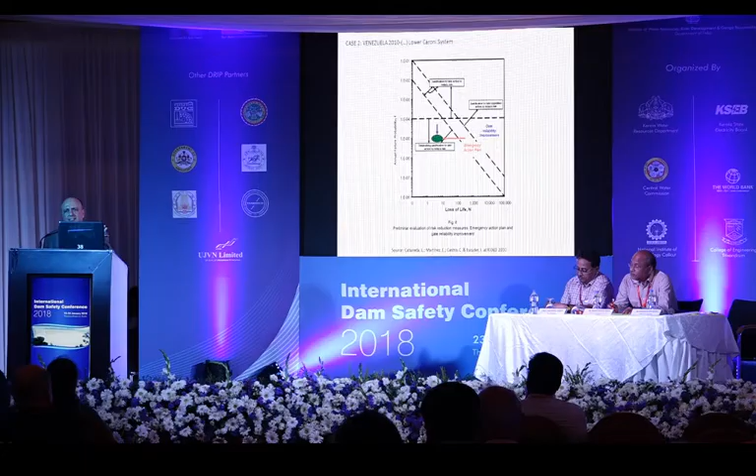So EDELCA shifted the focus... problems since the late 60s. And all this, I'm sorry, I can point there. Is the way you diminish risk by doing things.

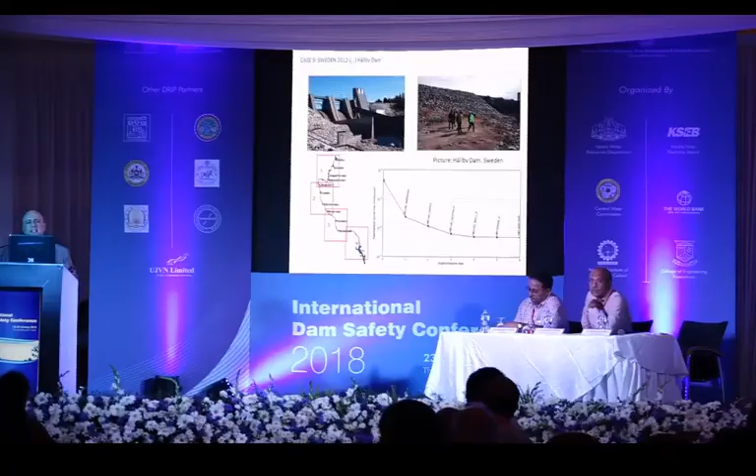So believe it or not, after 30 years, what was the ignition of an action plan, of spending money, of doing things, was that graph, in which you see the rate you can and how much you can diminish risk with your actions. So there's another magic in the numbers, which is, believe it or not, there are drivers of action, almost anywhere.

This study, for instance, is in the public domain. That's another lesson: transparency, being auditable, not having fear to show the way you made your decisions. That's smart, nice, modern governance, and that uplifts dam safety to a higher level of governance.

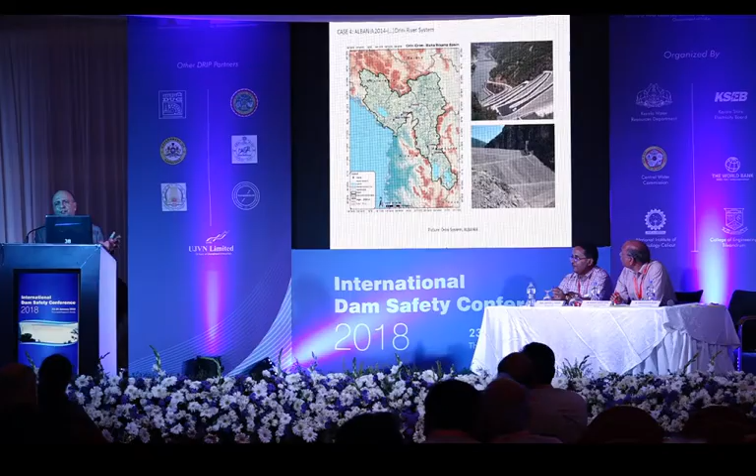Other systems with a lot of similarities to some of the projects maybe in other countries in which there's a lack of data, but you have a project so critical that if it were to fail, it would flood one third of the total surface of the country.

And you might not have a fully probabilistic approach. You might not have the inter-basin characterization of the flow as you wish, but you cannot wait 20 years to decide if you want a new spillway or not, or if it makes sense, or where it's more efficient to start with emergency action. So, accounting for uncertainties, assuming that we might be an order of magnitude right, or if you wish, an order of magnitude wrong, but we are not so much out of the picture.

When we put this graph to the owner, we built the numbers with them, and they assume they are very far right in terms of affected population, and they are clearly, no matter the exact number, above where they wanted to be in terms of probability of failure.

Again, you can account for and demonstrate the impact of your investments. If you see the horizontal movement, that's only with the emergency action plan. And it's not the same to say, I want to do emergency action planning because it has to be done, versus saying, in my particular system, I can reduce risk by two orders of magnitude. And that's a very compelling argument, two orders of magnitude.

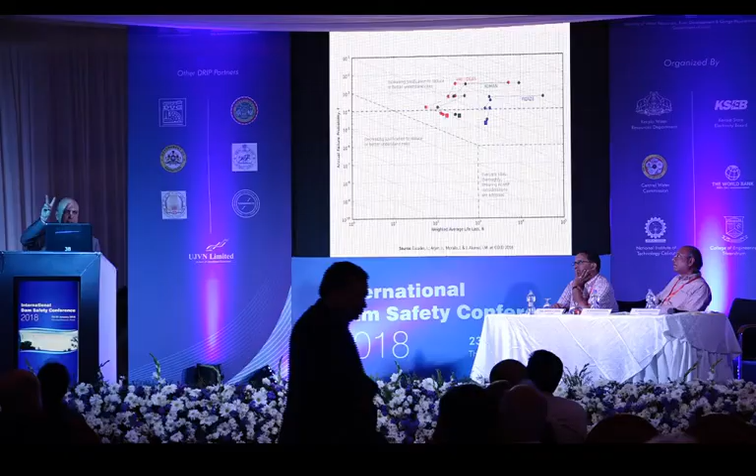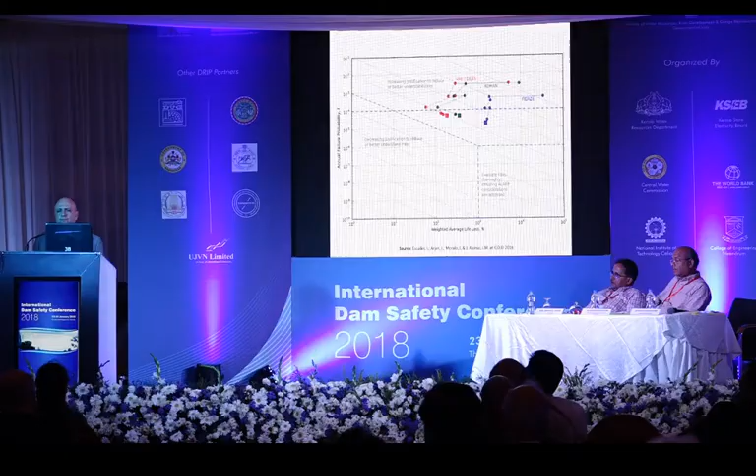And then the other things that will take a little bit more time will be complemented with data. There's something with the gates that can already be done, something with the operating rules, and that's the path KESH, which is a very strong public company in Albania, is moving forward with, motivating their human resources. So that's the path, and once you can plot the path, motivation of people increases.

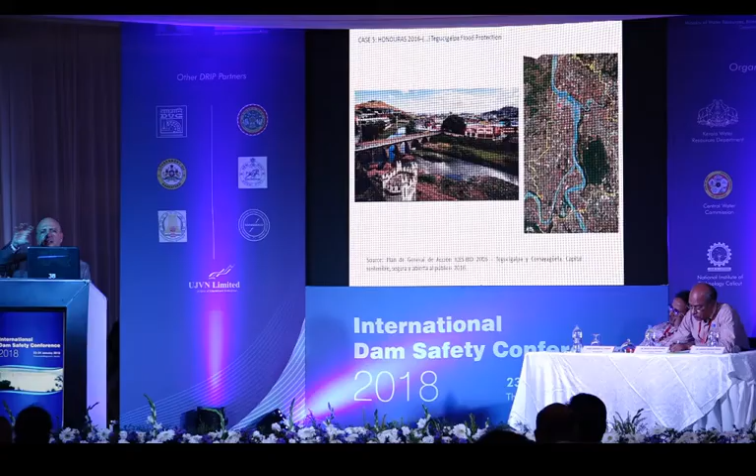More things about the scale. For instance, this is Tegucigalpa, Honduras, and they wanted to have a risk perspective only from the urban, more consolidated area perspective. But they would be getting a very wrong picture if they don't understand that these two dams, formerly far, have been embedded by the city.

So what you have is people living exactly in front of the spillway. You have a dam you cannot renounce because it is a water supply dam for the whole city, but you have embraced it with population, and the risk is 2, 3, 4 orders of magnitude higher than what you wanted. So what do you do?

First thing is don't say risk analysis is guilty of bringing the topic. The topic was there, quantification helps, and from there you can enforce urban policies, early warning, with a rational approach behind it. So they were brave enough to accept it and to have a more holistic approach to the urban flood risk, understanding the impact of what had happened from an urban point of view and the implications in policy and other non-structural measures.

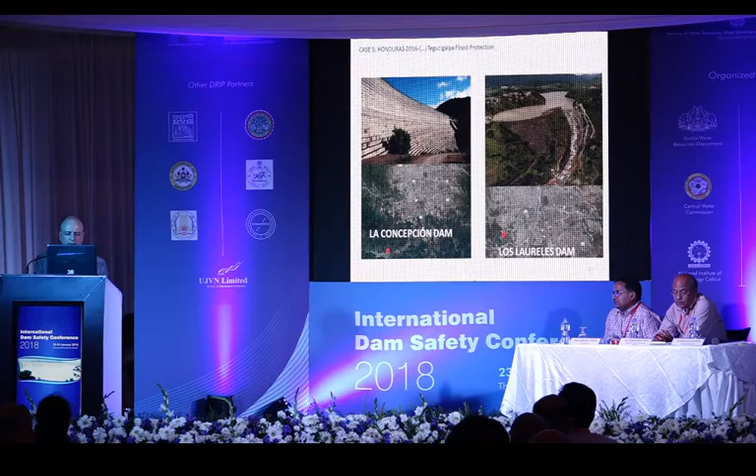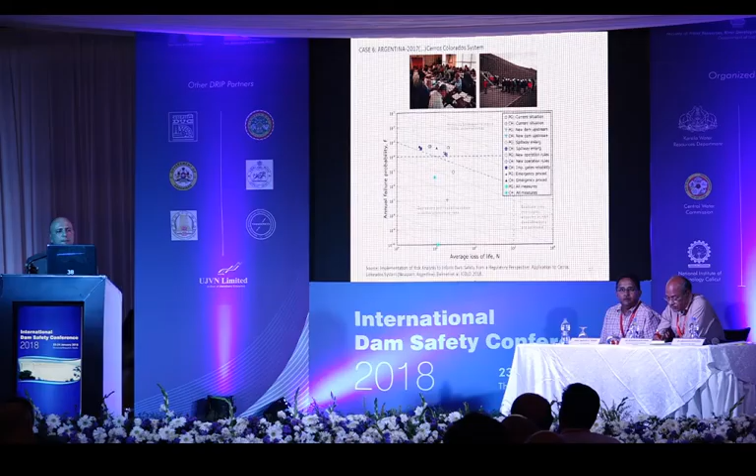Another value I want to bring to the audience is that if you are doing a collaborative approach on risk, by the time you get the numbers, the estimates on where you are and where you want to be, you already have the consensus if you have done it together.

Don't underestimate the value of consensus if you want to reach an agreement, especially if you've been working together. Because if there's ownership on the results of risk by the different parties, it will smooth the path to a negotiated solution. That's exactly what's happening in this very iconic project in Patagonia today.

Coming to this, though this graph is very nice because it ends up with the word success, denying the complexity and the problems would not be nice either. I wrote this paper with a colleague in the Corps of Engineers, Eric Halpin, who is in charge of the dam safety program for 400 dams, and the ontology, a proper definition of risk. The complexity, the uncertainty, the ambiguity, the tolerability issues, all that is not brought by risk analysis. It's there, but risk makes you address it whether you like it or not.

Second thing, and most important, is the last quarter: people, communication, and decisions. This is a joke I always make - you can write 100 articles and PowerPoints, pretend you are doing dam safety, but if you're not making any real decision, nothing happens. So either you have decisions and real investments at the end of the pipeline, or you have nothing. Either you have people engaged and capabilities, or you have nothing. Either you communicate it well, or it doesn't work.

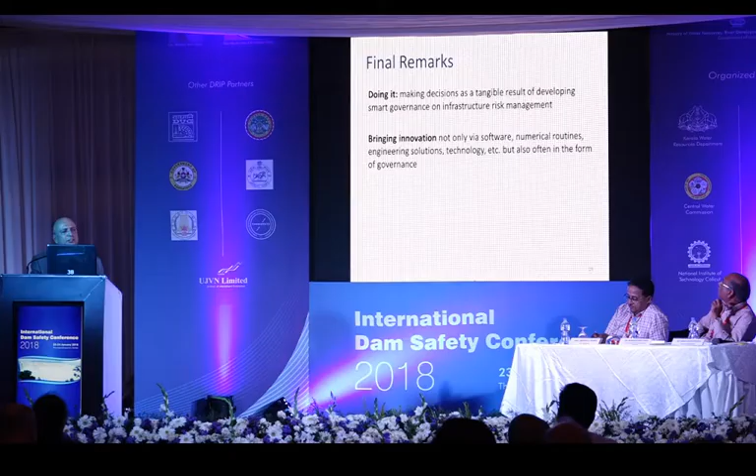Final remarks: if you don't go to the end and make decisions, you're basically doing PowerPoint dam safety. Bringing innovation with manuals, with guidelines, with legislation - innovation is not only algorithms, innovation is not only high cutting-edge technology. A good way to do things, a shift of paradigm, a conceptual approach is innovation. And this type of governance of dams is fueled by innovation and knowledge.

That's another collateral good you cannot forget. It's not a recipe, a cook recipe - it is how to incorporate knowledge in the chain constantly.

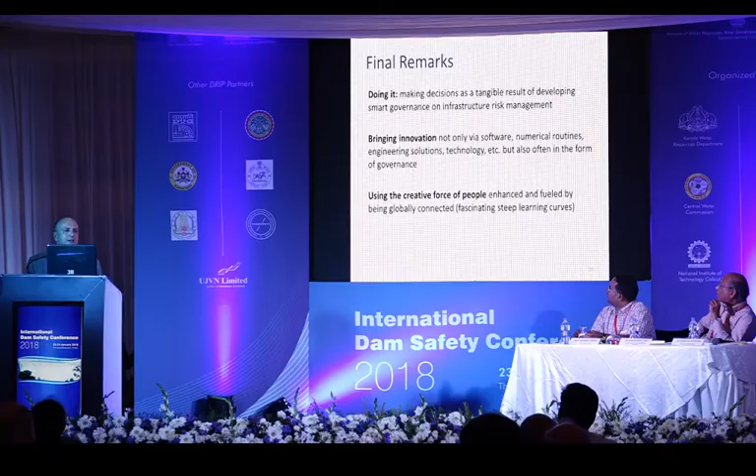Let's go back to globalization. So many people talking badly about globalization lately, right? Let's not underestimate the incredible learning curve that it allows us to have. You don't have to copy paste - you can bring best practices from all over the last half century. Do it your way, be creative, and be a leader very fast, and do things better than others very fast.

So paradigms shift in practice, and whenever you are tempted to say, oh, but we are doing better than 10 years ago, just ask yourself - is that good enough to cope with your real challenges? So go for it, that's my final thing. Thank you very much. Now I will be controlling others' timing.

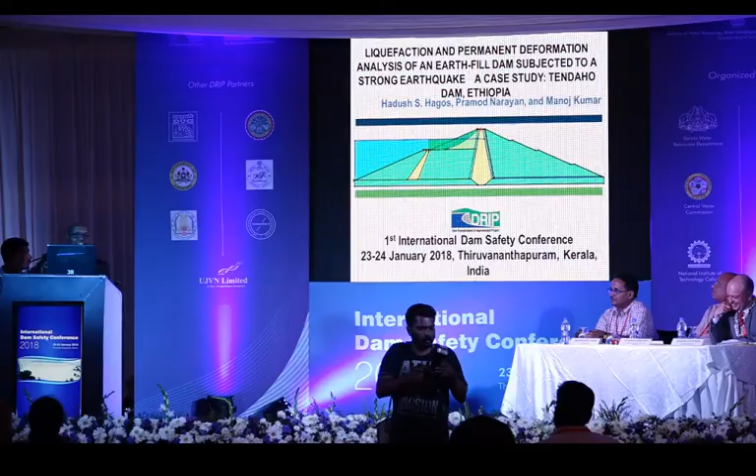Thank you so much, I'm very happy to be here. First of all, I would like to thank the panelists for their invitation. My name is Hadush. I work for the DRIP project in Egis, as the construction management and quality assurance expert for Egis. Because there is not much time, I think this introduction is enough.

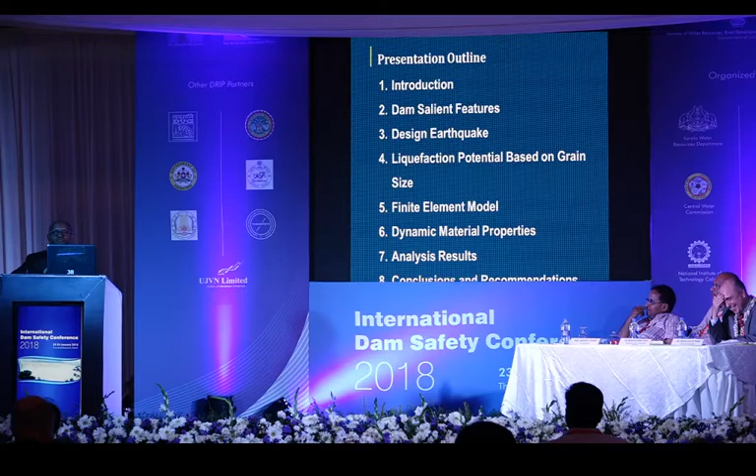This shows the outline of my presentation. I don't want to waste time on this, but I want to give some introduction. As you might have seen, the title of my presentation is Liquefaction and Permanent Deformation Analysis of an Earthfill Dam Subjected to a Strong Earthquake.

In the morning we heard that pseudostatic analysis is obsolete - I think Dr. Martin was saying that. Well, I'm not going to repeat that, but we need to do dynamic analysis, at least for dams designed on potentially liquefiable materials, or complicated geologies, or where you have high seismic areas.

Now just to give you a small introduction about earthquake engineering in dams: the first dams constructed in the first six decades of the 20th century, up to the 1960s, were found to be deficient in terms of earthquake design and flood design.

Of course, about floods, many people have been promoting improvements, and we have done additional spillways. We have improved many dams to help them behave against extreme floods. But in terms of earthquake, maybe it doesn't happen like floods every time, so a lot has to be done.

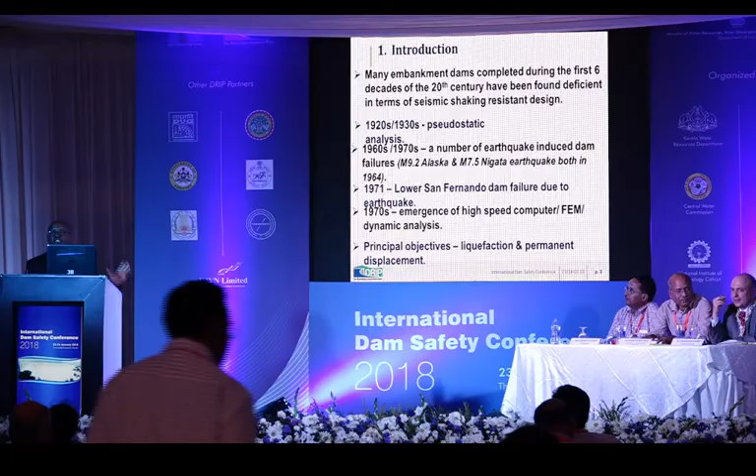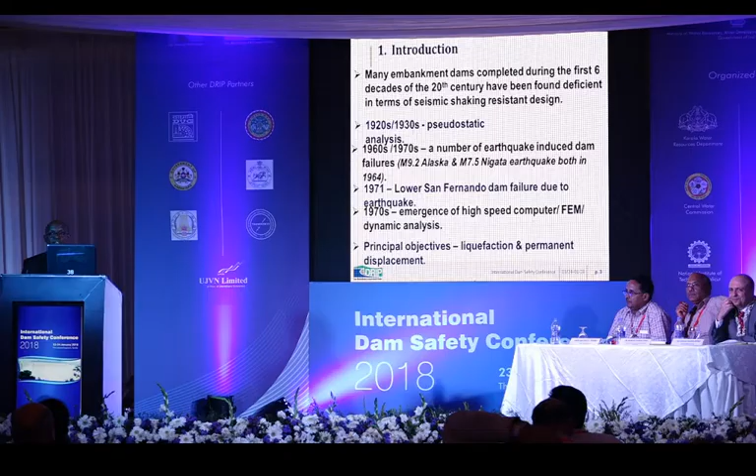The first time earthquake engineering was considered in dam design was in the 1920s, and that's when we started, in the 1930s, the pseudostatic analysis. In the 1960s and 70s, some earthquakes happened and some failures also happened in dams. People started to think that pseudostatic analysis may not be sufficient, or may not always predict the behavior of dams, and they tried other methods. About the same time, in the 1970s, new technologies in terms of high-speed computers and finite element method were emerging, and this gave interest to do dynamic analysis.

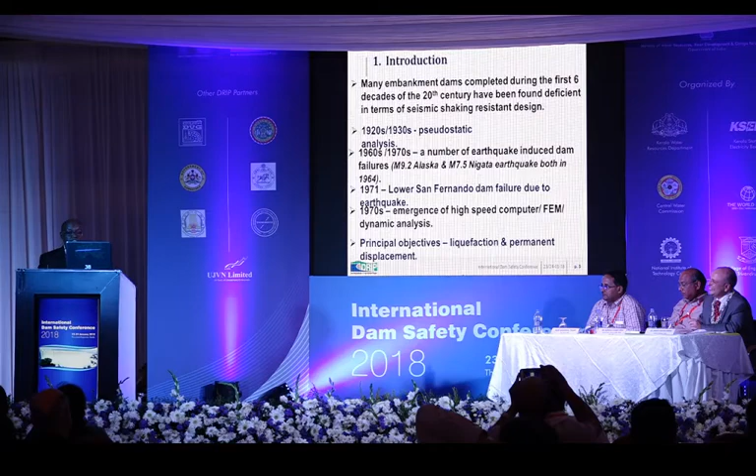Some examples of earthquakes are the Alaska earthquake, which is very large, 9.2 magnitude, and the Niigata earthquake, and these earthquakes brought focus on liquefaction of soils. And the Lower San Fernando Dam failure, because of the San Fernando earthquake, also brought attention to earthquake designs for dams.

So the main objective of dynamic analysis is to do two things. Number one, to analyze whether there are potentially liquefiable soils in your dam or foundation. Number two, how much will the dam settle, or how much displacement will occur on the dam, so that you don't lose your freeboard.

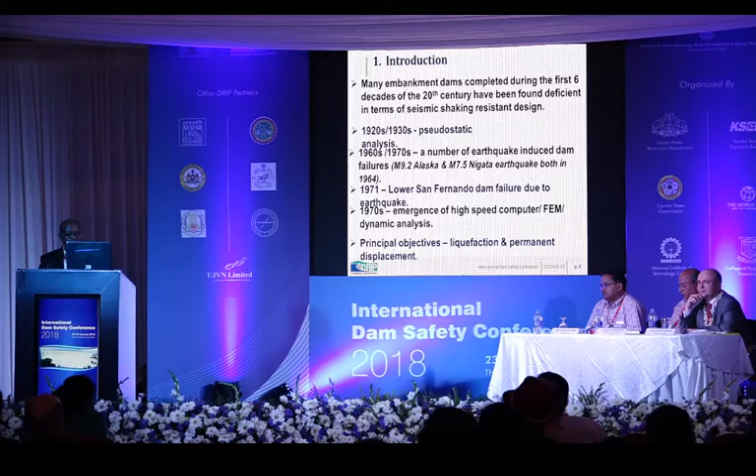So we wake up when we see something. We learn the hard way. Maybe, okay, Ignacio was saying it's not that reason, but I think people wake up when they see disaster.

So this is just giving you an example of how we behave to the behavior of dams. We act when something happens. Now that is the introduction. Now I will take you to my analysis.

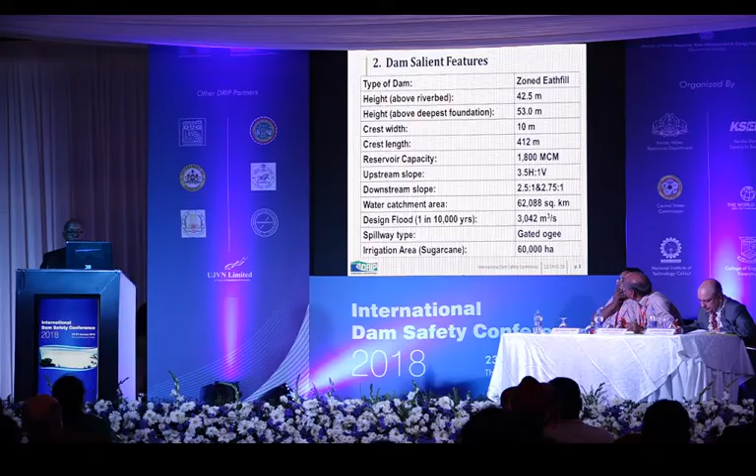I'm considering one dam in my country, Ethiopia. It's a zoned earthfill dam, about 53 meters high, and it stores about 1.8 billion meter cube, or 1,800 million meter cube, to irrigate 60,000 hectares of sugarcane. This dam was designed by Ethiopian experts and Indian experts from WAPCOS, so WAPCOS was part of this design.

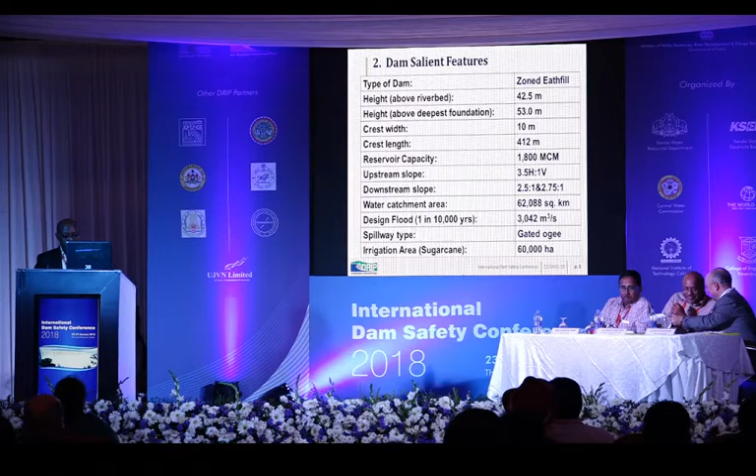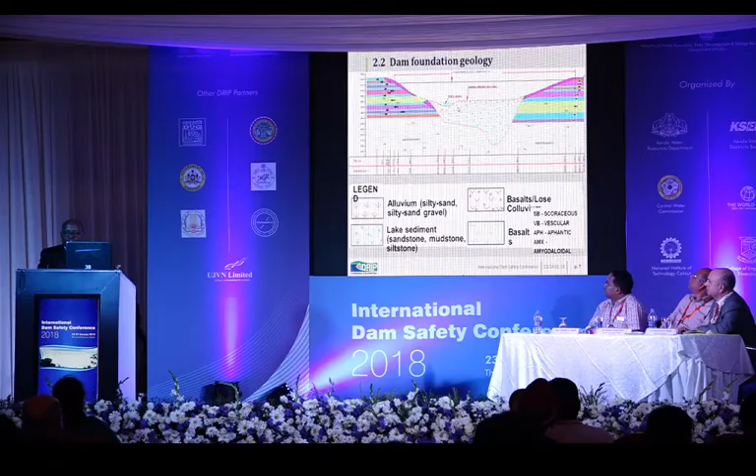It's very important. This is the dam foundation geology. It has three important components. The first is this part, which is alluvial foundation. The second part is what we call lake sediment, sandstone, mudstone. And the third part is basalts below all these layers, different types of basalts below these two layers. Our attention is on this top layer, the alluvial deposit, and its behavior against earthquake.

Oh, okay, so to do dynamic analysis... I don't know why my PowerPoint is messed up, sorry.

So we need peak ground acceleration. We had to determine the peak ground acceleration for this site. The horizontal peak ground acceleration is 0.3 g for the site. There are two earthquakes that we have to consider according to ICOLD recommendation. The first one is the maximum credible earthquake, which is the maximum expected earthquake in that area. The second one is the design-based earthquake, which is the earthquake expected to happen in the life period of the dam, with a 1 in 500 return period.

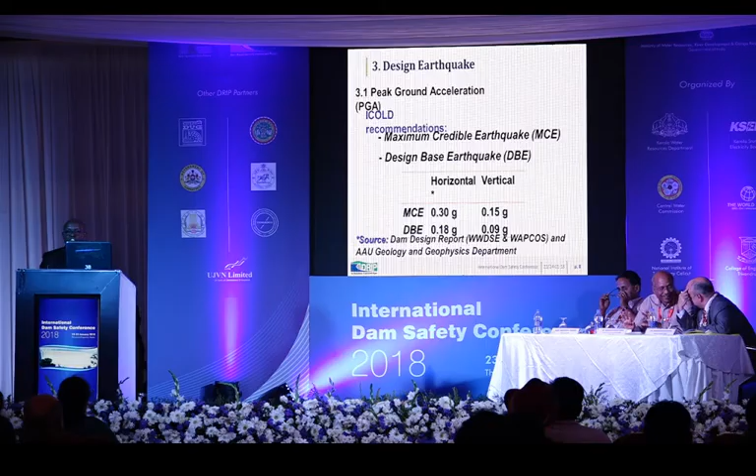Under the design-based earthquake, the dam should be stable and operational, even if you tolerate some damages. And under the maximum credible earthquake, the dam should not fail because of liquefaction, and it shouldn't lose its freeboard.

Now, that's only the peak ground acceleration, but to do a fully dynamic analysis, you need the acceleration time history spectrum. So you have to have the whole acceleration time history. Earlier it was said there is no data. We didn't have the full acceleration time history data, but we didn't give up.

So we had to use some data from elsewhere. We used 3 earthquakes: the first is the 1940 El Centro earthquake, the second is the Hachinohe earthquake in Japan, and the third is the Kobe earthquake, also in Japan.

But you cannot just take the earthquake data from El Centro and apply it in Ethiopia. You have to remove the site and geology effects in El Centro, so we had to do the so-called deconvolution. All these earthquake data are deconvolved, meaning the geology and site effects were removed, and they were taken back to the bedrock so you can use and apply them in other places.

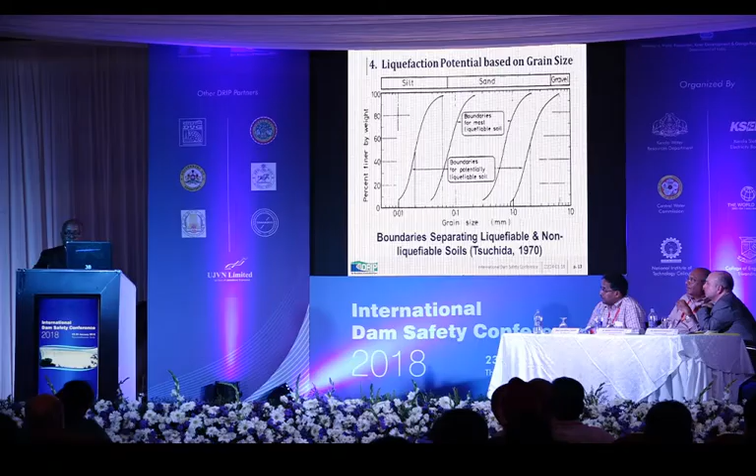This is analysis based on this envelope for the dam body. As you can see, the envelope is between here and here, but the dam shell materials are mostly outside of this envelope, so we didn't consider them as potentially liquefiable soil. But if you consider the dam foundation, 85% of it is within this boundary, so we had to consider it as potentially liquefiable soil.

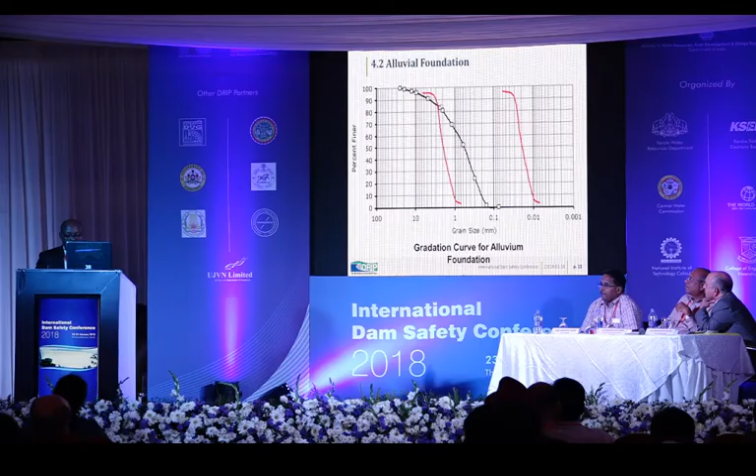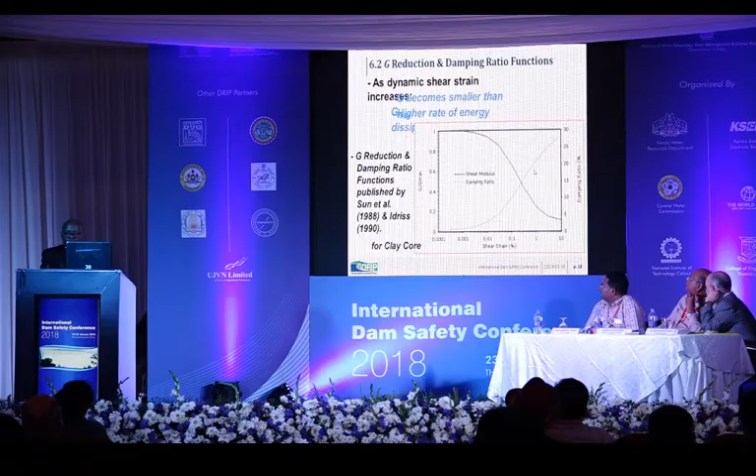This represents shear modulus reduction versus damping ratio of a given soil. This is for the clay core, and this is for the alluvial foundation and for the stone.

Now the analysis results, where we have reached on the results. The first thing we evaluated is what was 0.3 G at the bed becomes what at the dam crest. As you might know, soil always amplifies the earthquake. So it was 0.3 G at the bed, but when it comes to the dam crest, where you have the spillway and other structures, the peak ground acceleration becomes close to 0.9 G. There's a lot of amplification in this structure, and it's the same for both cases.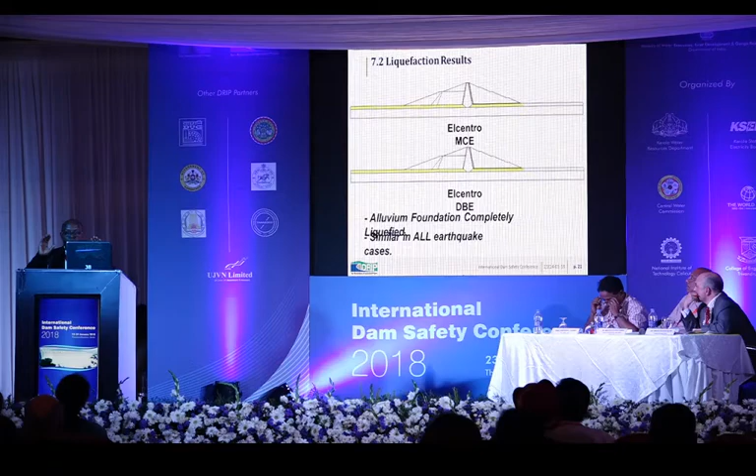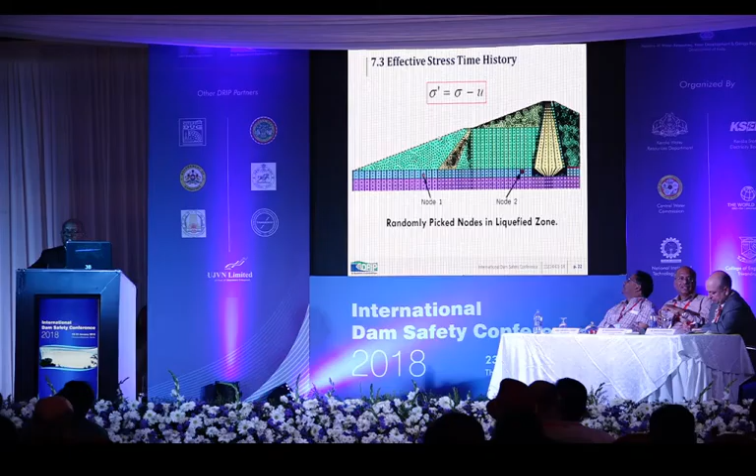We also did some effective stress time history analysis. In this finite element model there are many options you can explore. We studied the effective stress time history for the liquefied zone. As you can see, when the acceleration time history hits zero, that's where the effective stress is zero, and that's when the soil behaves as liquefied. So the strength of the soil depends on the effective stress.

We also did some liquefaction time stage analysis. Until the 13th second for the maximum credible earthquake, there was no liquefaction. But once the effective stress hit zero level, the soil liquefied.

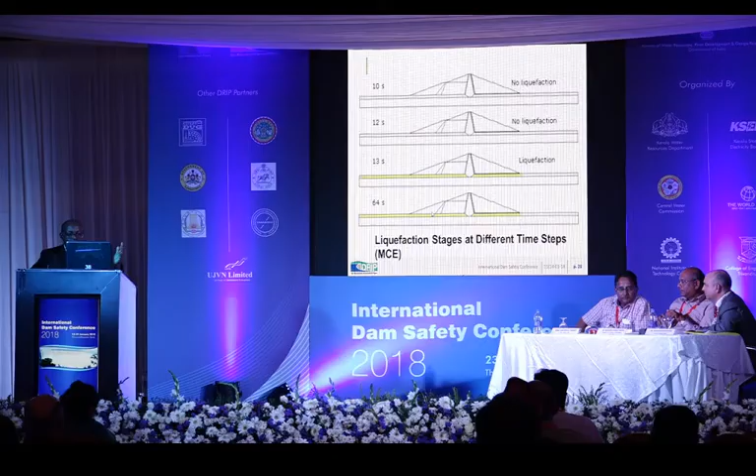The second important component was to determine the permanent displacement, how much freeboard you lose. We analyzed several slip surfaces: those that start at the dam crest and end at the toe of the dam, and those that start at the crest and end at the berm. The most critical slip surface was this one. It involves almost 50% of the dam crest, so the freeboard is much affected, and it settled about 70 centimeters, which should have been added as part of the freeboard.

This was not considered initially, so we had to add 70 centimeters to raise the dam to account for this settlement.

So as a conclusion and recommendation, am I okay?

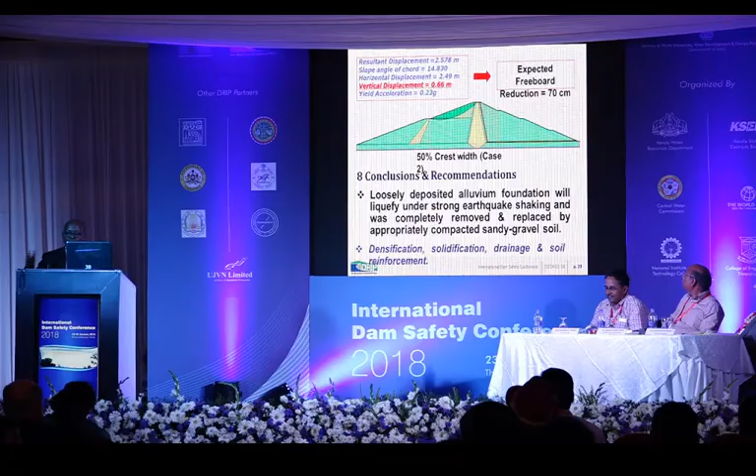Oh, okay. So what we did first is remove the completely liquefied foundation soil. But we were lucky to do that because it was not deep. You cannot do this everywhere; you cannot remove it from existing dams, for instance. So you have to use other remedial measures for that.

We added the vertical displacement to the freeboard. There was a parapet wall of 1.5 meters, which we removed because if the slope fails, it won't help the freeboard. And because there was a big horizontal displacement, we had to add about 3 meters of filter to account for the cracking of the clay core. Thank you so much.

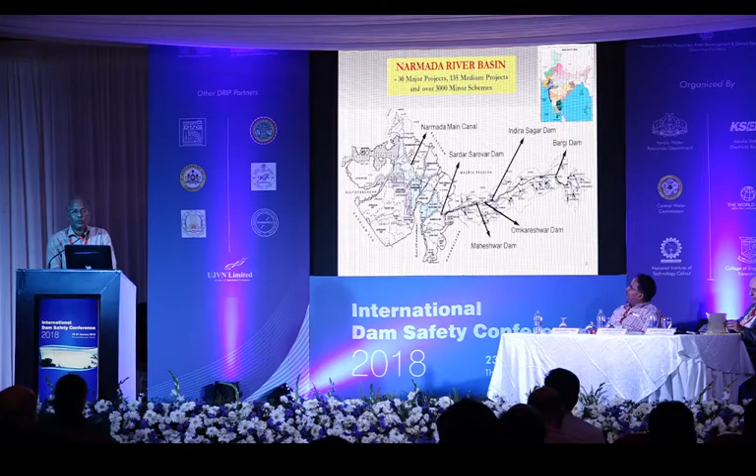In fact, the dam is very close to the heart of our Prime Minister, and recently he has dedicated it to the nation also. It is an interstate multi-purpose project involving 4 party states: Gujarat, Madhya Pradesh, Maharashtra and Rajasthan.

You can see the benefits: 18.45 lakh hectares in Gujarat, 2.46 lakh hectares in Rajasthan. Power also 1450 megawatt, and drinking water to 131 urban centers and 9,633 villages in Gujarat, and in Rajasthan also 2 urban centers and 1,107 villages get drinking water.

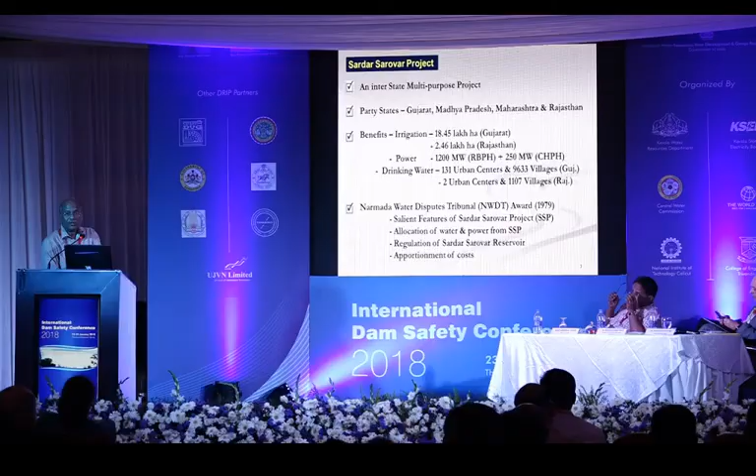There has been a dispute, and we have the Narmada Water Dispute Tribunal, which gives the salient features of the project: allocation of water and power for SSP, regulation of Sardar Sarovar Reservoir, and apportionment of the cost also. As I said, it has a very checkered history of construction.

It started way back in 1961 with the laying of the foundation stone by the then Prime Minister Pandit Jawaharlal Nehru. It made very slow progress, and finally reached some level in 1995, that is the 80-meter height. But at that time it got stopped because of Supreme Court intervention. There were issues regarding environment and rehabilitation, and the project got stopped. It got clearance only in 2000.

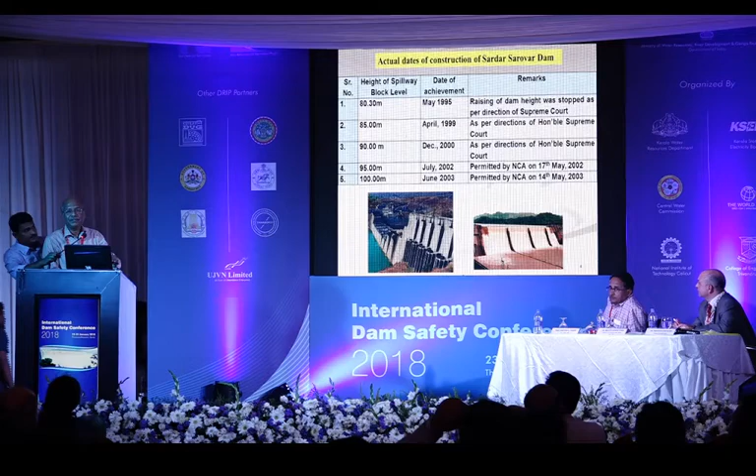So every 5 meters the construction was done, under the concept of pari passu completion - as you complete the environment and safeguard measures and complete the R&R, the dam raising was allowed. Finally, the authority to permit further raising of Sardar Sarovar Dam was given to NCA, and the subsequent permission was given in 2002, and for raising to 100 meters in June 2003 also.

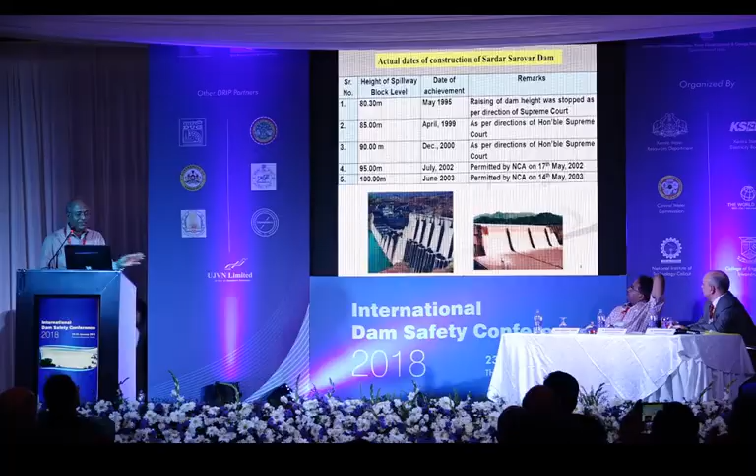The photographs show different stages of construction as it proceeded. In 2004, permission to raise up to 110.64 meters, the minimum drawdown level, was given. But the actual benefit started in December 2006 when the dam level rose to 121.92. And finally in July 2016, the permission for installation of gates was given.

The photograph you see below on the left side, as well as on the podium, was given without the bridges while the gates were constructed. Now the gates have been installed, and the dam has been inaugurated and dedicated to the nation by the Prime Minister.

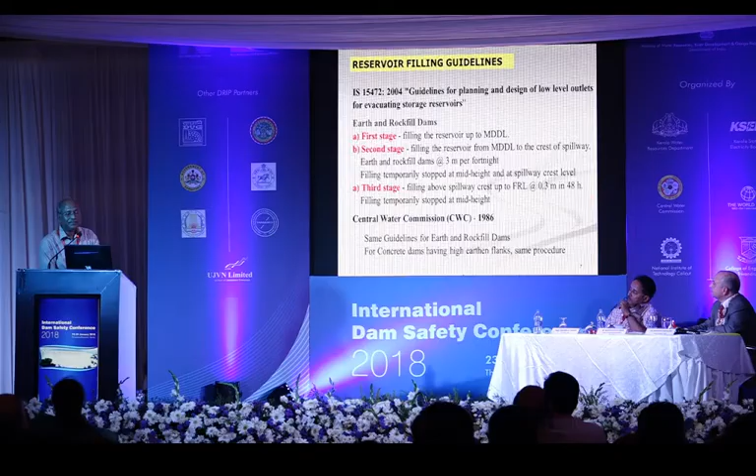When the permission for final raising was given, the Narmada Control Authority, which had the power to give permission, made a very specific recommendation with regard to safe filling. It gave the responsibility to the Sardar Sarovar Reservoir Regulation Committee to ensure the phased filling of the Sardar Sarovar Reservoir, along with dam safety inspection and proper monitoring of actual submergence. So safe filling was duly recognized while giving permission, and the responsibility was given to the Sardar Sarovar Reservoir Regulation Committee of the Narmada Control Authority. Naturally, we looked into our Indian standards and international best practices.

We have our Indian Standard Code which prescribes guidelines. We also have Central Water Commission guidelines. Those guidelines are primarily for earth and rockfill dams, but have been extended because this dam has a checkered history.

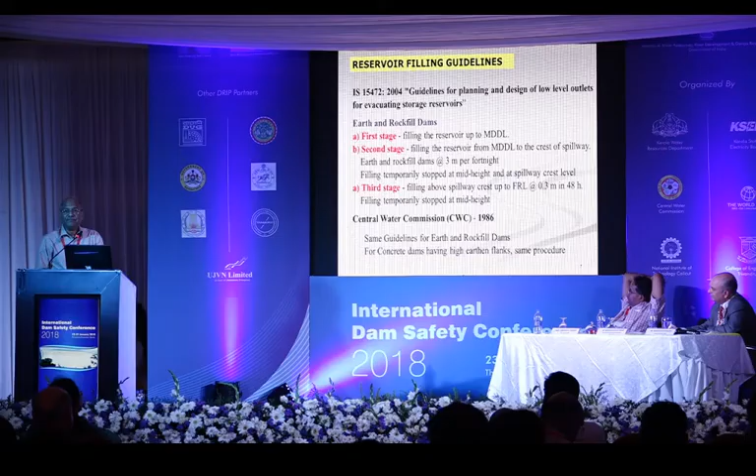The construction got stopped at several places, so we had to be extra careful in letting the dam fill for the first time. So we planned a kind of phased filling, and we took the following criteria.

Since 121.92 meters was already reached since 2006, 10 years had passed, so we said up to 121 we can go straight away. Thereafter, in one flood we reached 131.18 meters, so we said the next stage we can be at 131 meters.

Then a hold-on period of about 10 days at that stage, when the dam safety inspection could be carried out and submergence monitoring could also be taken out. Thereafter, further filling with only 30 centimeters in 48 hours. That kind of filling was planned.

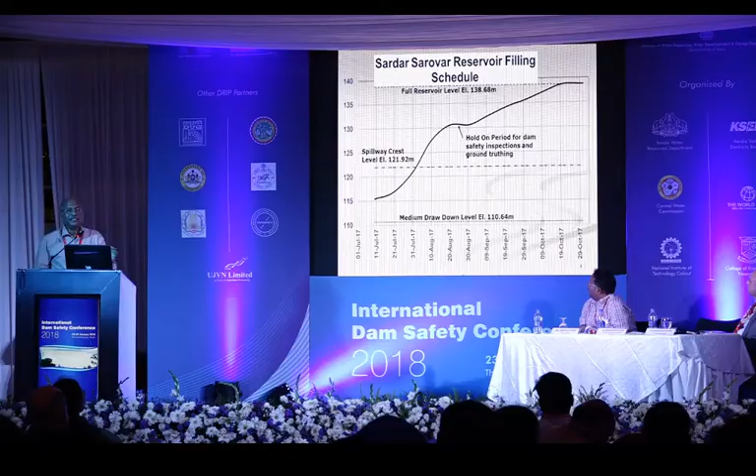If you see the graph, the planning was done - minimum drawdown, the spillway level was already reached in 2006. So first there was a hold-on period, and then finally the gradual filling of the dam was planned. The dam safety inspection was also carried out during the hold-on period.

It was inspected by the dam safety panel. The operation of the gate was tested by slight opening. Inspection of dam galleries was carried out. Seepage was found to be a little more than expected.

The most important recommendation was the revival of instrumentation. In fact, most of the instruments do not function, and the panel recommended how we can revive it and how we can introduce instrumentation at this stage.

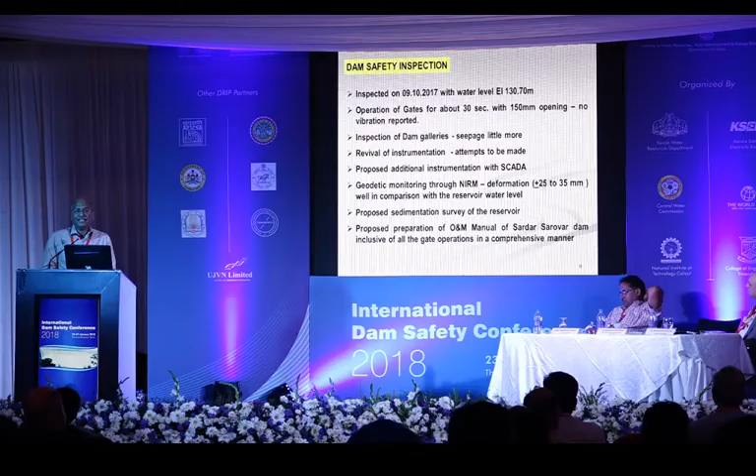I think the lesson for us is that when a dam is being constructed, we should be extra careful, rather more than careful, about having the instrumentation also.

As a substitute, we had the geodetic monitoring, but geodetic monitoring only gives the surface deformation. Of course, that was very well within the limits. It also proposed a sedimentation survey of the reservoir and preparation of the O&M manual of Sardar Sarovar Dam.

So these were the first dam safety inspections carried out after permission for filling of the dam was given.

The monitoring of submergence through remote sensing was also attempted. This is the first time submergence and filling is being monitored through remote sensing. So we requested BISAG to take satellite pictures monitoring the filling, and to see how the rehabilitation and environmental safeguard measures have taken place pari passu.

So if any island is forming or any landslide is happening anywhere, we will come to know immediately, and then corrective action on the periphery of the reservoir could also be taken.

A submergence model was also prepared in real time and was monitored, and in addition the state governments prepared a contingency plan also.

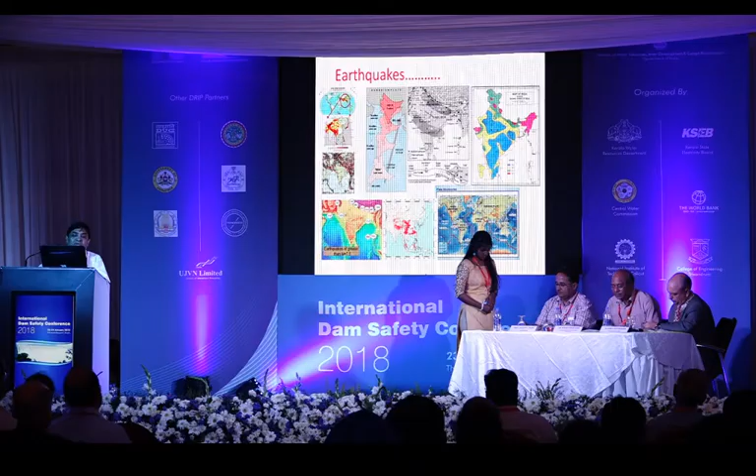Going back in the time range and time scale of earthquakes, if you see at the global level, the seismic hazard values in India are quite high—you can see the red portions, especially in the Himalayan range. This gives an idea of how much earthquakes are happening, and the reason is the Indian plate moving towards the Eurasian plate. It was around 70 million years ago that it started, and it collided with the Eurasian plate around 50 million years ago. Then the Himalayas started forming, and earthquakes have been occurring since then.

There is no place in India now where you can say there will be no earthquakes. This is quite clear from the seismic zoning map of India also—more than 70% of the area comes under high seismic zones. You can see earthquakes of more than 7.5 magnitude which have happened in India, and they are because of plate motion. These motions have been worked out using GPS and older techniques like triangulation, which civil engineers use—it's all because of plate motion.

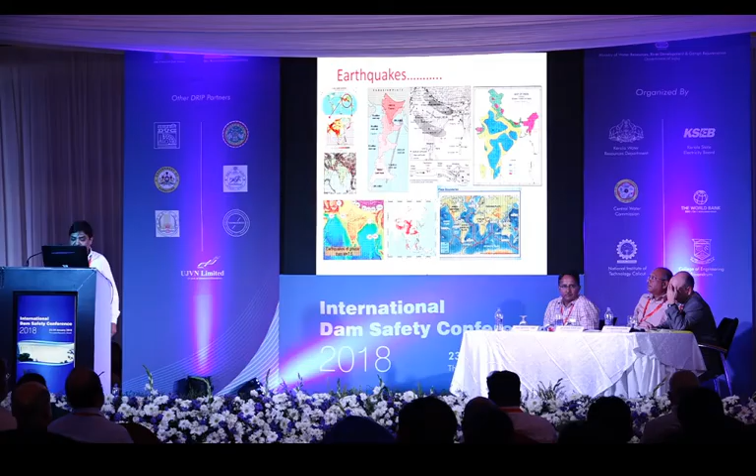With this background, let us see what we do in seismicity studies. We monitor the seismicity in the environment of the engineering project. We want to delineate the seismic sources, because these will be used to calculate earthquake forces for design purposes. Then we study these sources for their physical process—how they are happening, what physical process is going on, including the sense of motion near the dam. We also study medium characteristics—how energy attenuates and amplifies in the medium. And if we monitor seismicity for a longer time, we can determine whether there is reservoir induced or triggered seismicity or any other phenomena.

Hazard is the basic thing, and since this is a dam safety conference, if we want to estimate the risk, hazard is one of the important factors. So what we need is to mitigate the seismic disaster. Because there has been a lot of development in earthquake engineering, we can make the best use of ground motion data for seismic resistant designs. We now have very nice modern equipment with quite a good dynamic range and very good resolution.

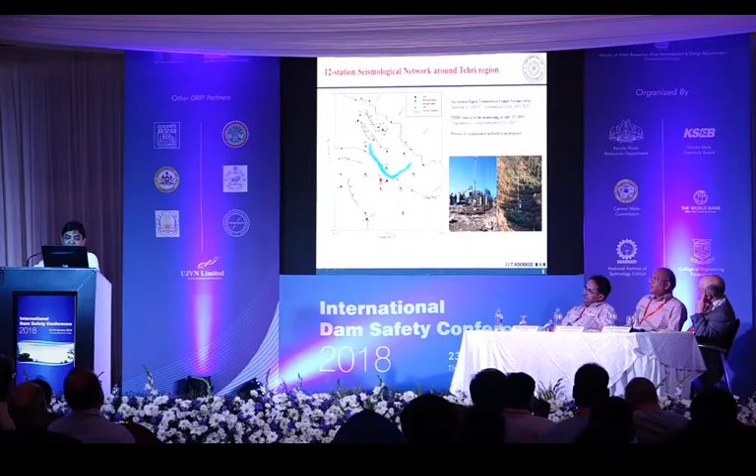So these type of instruments are deployed there. It is a telemetered array. All the information is coming in real time to New Tehri town, where we are recording this seismicity. 9 stations are radio telemetered, and 3 stations are standalone, and we have a central recording station at New Tehri.

I'll give a little background on data processing - we are collecting data continuously, then processing it for phase identification. There are P and S phases and surface waves coming in. Then using some software we are locating and finding the time, and this information we regularly give to THDC. Then we refine the locations, estimate the source parameters, and give the depth sections and seismicity map for the annual report. There are many PhD students and master's students doing advanced research, which I will show you later in this talk.

We are carrying out about 4 types of things. One is the basic thing, where data collection is there, and we are archiving this data for future use. Then simple things, where we are locating events, finding epicenters, associating them with tectonic features to get the seismotectonic model. Then we look into the temporal and spatial variations, including depth sections. Then calculating hazard parameters, focal mechanism, source parameters, and other analysis.

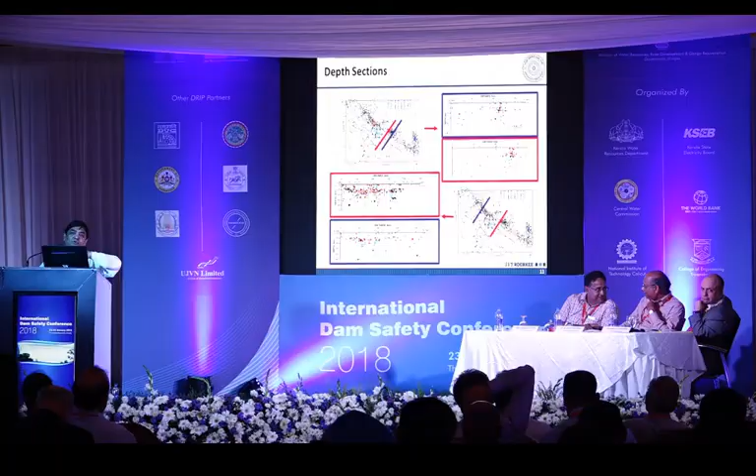For example, this is the number of earthquakes per year, so you know whether they are increasing or decreasing with time, with number of events within 20 kilometers, 40 kilometers, with focal depths, and whether they are clustered in particular sections. You get the depth sections, so you know how they are behaving with depth, and how the focal mechanism is working - the sense of motion below the dam.

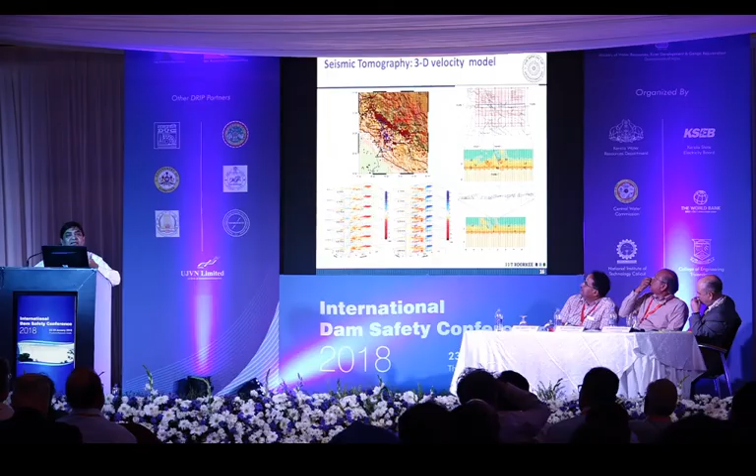Then you can find the three-dimensional model below the dam, which gives you an idea of how the sources are varying. In this case, we have found a ramp. Now in future, if I want to recalculate and re-estimate the seismic hazard, I will be concentrating here rather than the old models where I know there is a decollement going on. So this type of advanced research is also going on.

This we have done for Kol Dam, Lakhwar Dam, Tehri Dam, and in the past for around 15 dams or so. The strong motion recording is one of the important parts - this has to be inside the body to find the response. So in Tehri, we have deployed it in the Tehri Dam body, the powerhouse, and the Koteshwar Dam.

The strong motion recorders are deployed there, and we have recorded many earthquakes far away from this site. But we measure how much strong motion in terms of peak ground acceleration, peak ground velocity, or peak ground displacement they are giving at the site. This information will also give some idea about the health of the dam, because you can find the response of the dam in wake of the strong motion, recalculate its period, and find whether there is some deterioration in material properties or not. We have been doing this in the past, and these are very important studies. That's what I want to emphasize here.

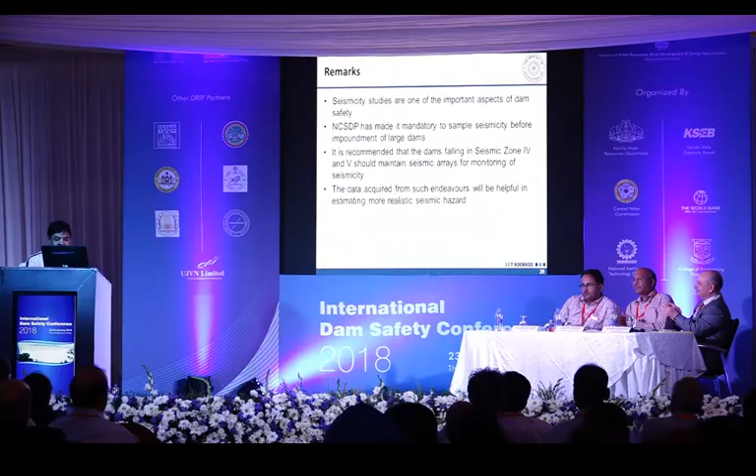Myself, Dr. Alok Mahapatra. Basically, I am the Chief Geologist in Government of India, PSU. Sir, I have one question.

For seismic hazard assessment, BIS already developed the seismic zonation map in 2002. After that, we have done a lot of work in microzonation, like Bangalore, Kolkata, and other metro cities. But till now, a typical seismic zonation map of India like the 2002 BIS map has not been developed, on the basis of which any costly project would be built within that environment. So that is the first question - the planning from the expertise side should concentrate on that.

Second, sir, whatever PGA or seismicity you consider for analysis of a particular region is subject to the tectonic features. So can you consider, for the seismotectonic analysis of any dam in India, concentrating on the seismicity as well as the geological tectonic features, because these are the two parameters very vital for any construction.

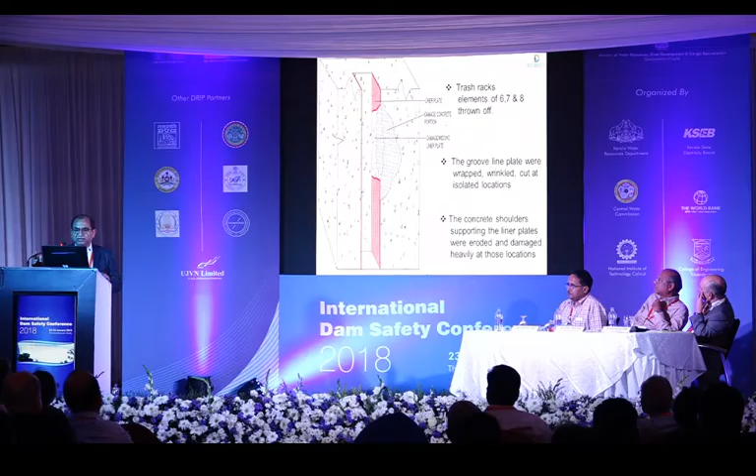During one generation mode, due to some reason not known at that time, elements of numbers 6, 7 and 8, where the trash rack had fallen down. The groove liner plates were warped and wrinkled at different locations. Along with that, the concrete support shoulders which support the liner plates had also eroded and were damaged heavily in many places.

The main challenge was that if it was a surface condition, there wouldn't have been any major difficulty. But the situation was that at the exit structure there was 25 meters depth of water, and we had to reinstall the entire system at that 25-meter depth.

There were two options for doing the same: either we dewater and make a coffer dam, which was just not possible, or we do the entire work underwater.

The major steps involved were: first, since a lot of elements were already stuck in various locations, we had to do a lot of underwater cutting using underwater cutting equipment and lift them out from the vents. After removal of elements, we had to remove the various guide plates which were in different shapes due to the damage.

After that, we had to plot the mapping at a very micro level, since the elements had to be replaced in the same conditions, and that's why we decided to carry out an underwater survey. However, the problem was that in the underwater survey we didn't know exactly where the plates or concrete had been damaged and at what locations.

So we first decided to remove the elements and all, and after that we carried out the survey to assess the damages and locations of various plates.

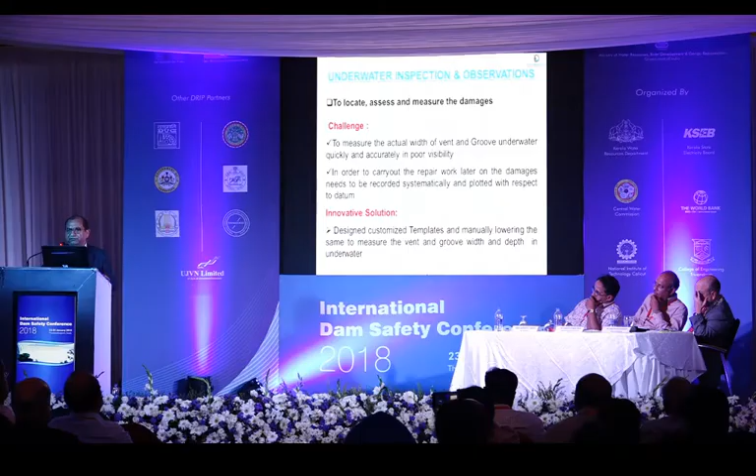For assessing the damages, there was no particular method to know exactly what the damages were. So we created an innovative solution: designing customized templates and manually lowering them into the vent, so that we could know where it was sticking and what damages were there.

This template was created using a central segment which was fixed, and two left and right segments which were movable. Using this left and right segment we could move within the vent, and the template was lowered using a derrick. The center line of the vent was aligned with the center line of the template.

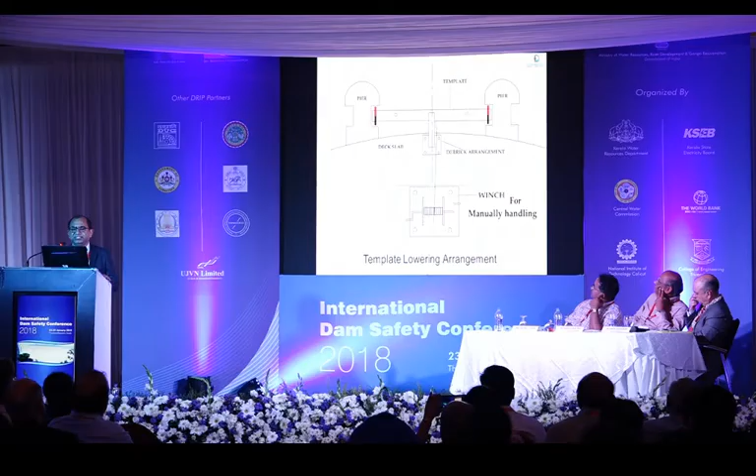However, we kept the template height to just half a meter, 0.5 meter, because there were chances of it getting stuck during the operation.

This was basically the template. As you can see, there is red color and black color which can give us the vent dimension, and along with that there was another problem which was measuring the grooves and bearing also. There were 3 dimensions in any vent.

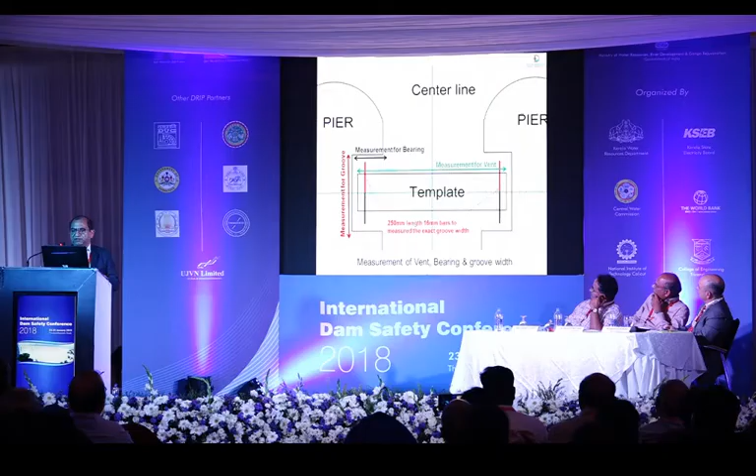With this unique system we were able to measure, and after measuring we could plot it on a graph, so we could know where the depth and width of the elements or groove had changed, and the same could be mapped. After this, we had the mapping of where the damages were.

We found that in many locations, during the construction stage, the vent size was less, or the groove width was on the lesser side, or bearing was not available. This happened during construction itself. The contractor who installed the element just fixed it by pressure or some other method and left it like that. So after the operation started, wherever the loose elements were, they fell off.

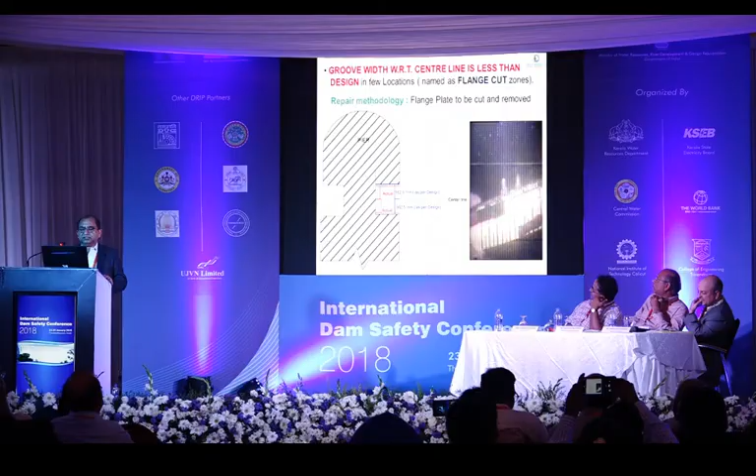Now, the entire thing had to be created underwater. So we created a unique system of installing an angle, ISA 60 by 65, which could act as an angle, and simultaneously we welded an MS plate along with the angle which created the gap for the flange plate. Using this system, wherever there were differences, we could provide the extra bearing as well as the actual groove width required.

After installing the same, using underwater drilling machines, we fixed it using an anchorage system along with anchoring compounds.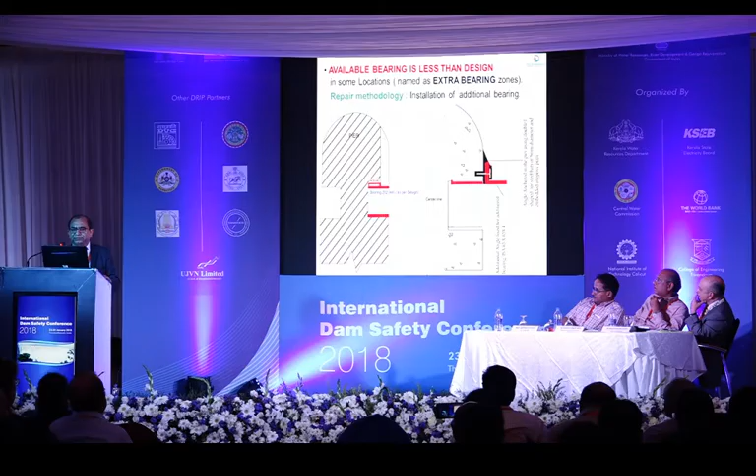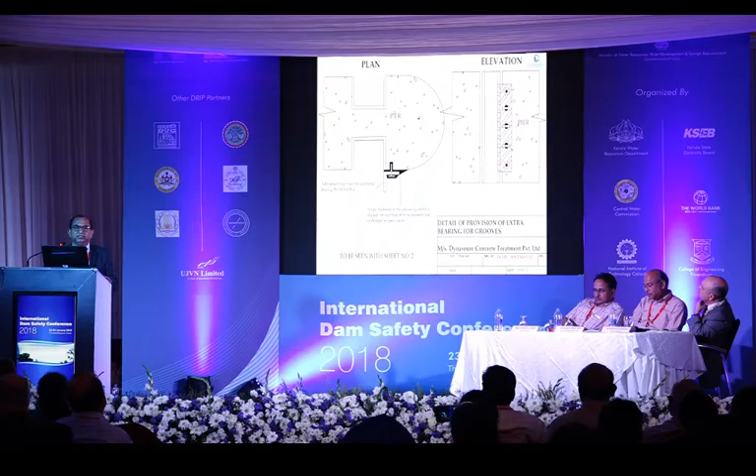This is the basic dimension of the same. At different locations, since the entire depth was up to 25 meters, at many locations drilling itself was taking a lot of time, because at higher depth drilling was not feasible or was taking too much time. So we had to create a unique system where we drill the entire system and fix it at the top using customized templates, then fix it underwater using bolts and nuts.

For the repair scheme, wherever only damage was there, we fix MS plates using GI sheets and fill the same with epoxy grout. This is basically the design of epoxy grout wherever only the concrete was damaged.

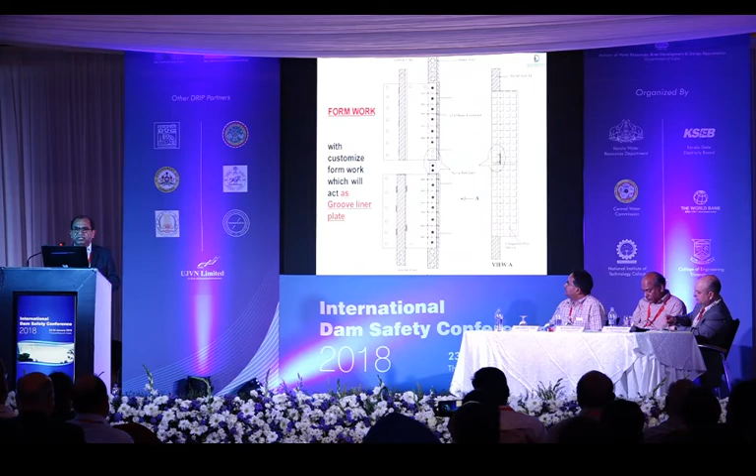Formwork for the groove liner was used with nuts and bolts. The entire operation everywhere was carried out underwater. This was also a specialized formwork.

Challenges and solutions at that level: the entire work had to be carried out underwater at various depths. As you might know, working at depth has a lot of challenges because divers have limitations of working time depending on depth. So for a 25-meter depth, a diver cannot work more than 20 minutes. We had to provide a large number of divers along with breathing equipment, saturation diving equipment, and health checking of the divers was also very important.

The difference which we found was between actual and design dimension. That was a challenge which we had to solve using unique systems.

As for the material which was concerned, the material chosen should cure underwater, and it should flow, because the entire material was poured from the top. So it should flow in the water, gain strength underwater, and not dissolve. It should also achieve high early strength with moderate setting time, because plant operation cannot be kept shut for long. That was another challenge, which is why we had to complete the entire work in only 25 days of shutdown. That was a very big challenge for us.

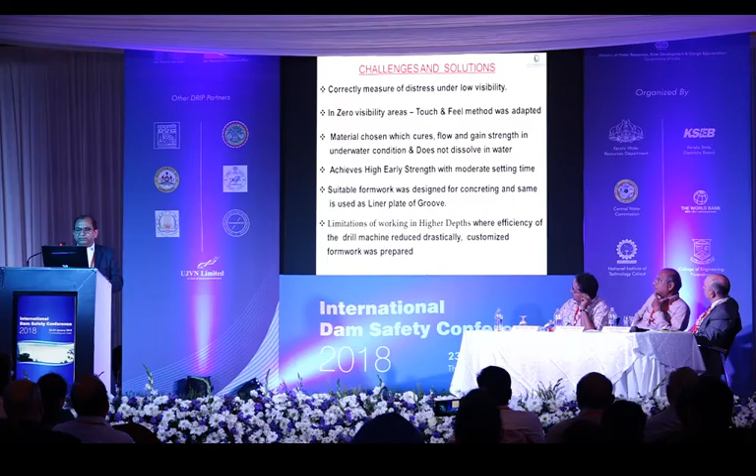After this installation, we reinstalled the templates and moved the grooves, and found the templates were moving very well. So the entire operation was carried out very successfully.

I have one small video clip of the same. I will show you that.

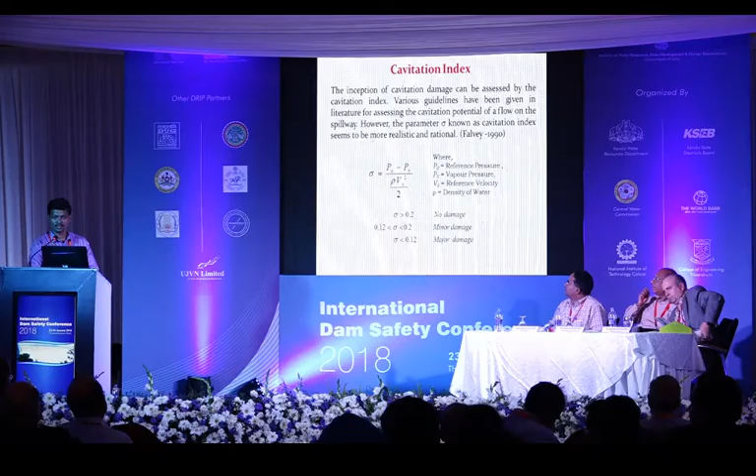The inception of cavitation damage on spillway can be assessed by the cavitation index, and the parameter sigma seems to be the more realistic and rational one. Here you can see in the formula, V is in the denominator. So for high velocity, sigma will be lower, and as sigma is lower, the chances of cavitation over the spillway will be higher.

These are certain photographs which depict cavitation on mammoth structures like spillways, and what cavitation can do to the spillways. And if the spillway is in danger, certainly the dam will be in danger.

There are methods of prevention of cavitation damage: prevention of cavitation from occurring, use of damage resistant materials, and forced aeration. Prevention can be done by proper design of spillway, strict surface tolerance, or limiting the cavitating velocity. You can operate the spillway with lower head so that the cavitating velocity will be less.

For damage resistant material, high performance concrete, steel fiber reinforced concrete, epoxy or polymerized reinforced concrete can be used, or material like stainless steel can also be used for cavitation resistance.

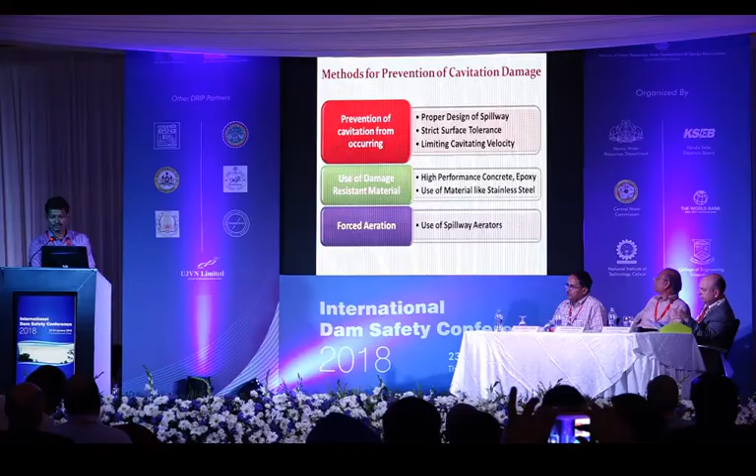For forced aeration, the use of spillway aerators is the most economical and popular way of mitigating cavitation. Aerators are devices or arrangements provided on the spillway surface in such a way that the flow is lifted from the bottom and a sub-atmospheric void is created, which demands air, and that air is supplied through the air duct.

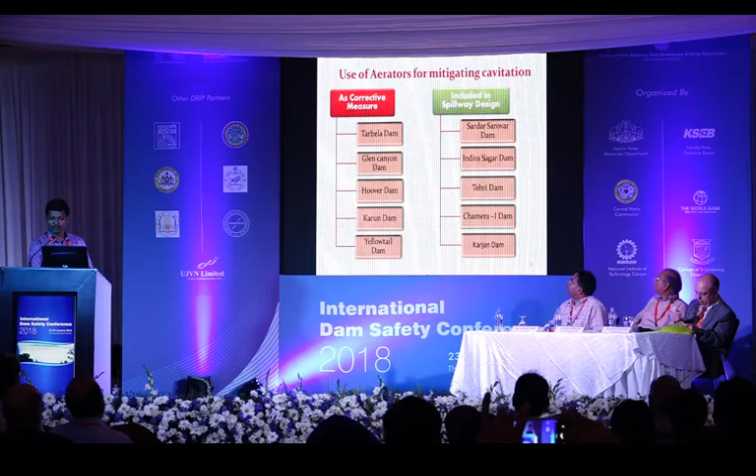It can be seen from the literature that if the air content in the flow is 6 to 8%, the chances of cavitation can be eliminated. Aerators have been used worldwide for mitigating cavitation on major dams like Tarbela, Glen Canyon, Hoover or Karun. They are used as a corrective measure, and have been included in dams like Sardar Sarovar, Indira Sagar or Tehri Dam.

I am here discussing hydraulic model studies which were conducted at CWPRS Pune for orifice spillways having more than 50-meter head over the spillway crest, for which cavitating pressures were there, and for different cases the solution was different.

Here you can see the 1:40 scale 2D sectional model which was constructed at CWPRS Pune, and the studies were conducted on the spillway of size 6.1 meter by 12.6 meter, which has to cater to the design flood of 12,981. The discharge intensity is of the order of 300 meter cube per second per meter.

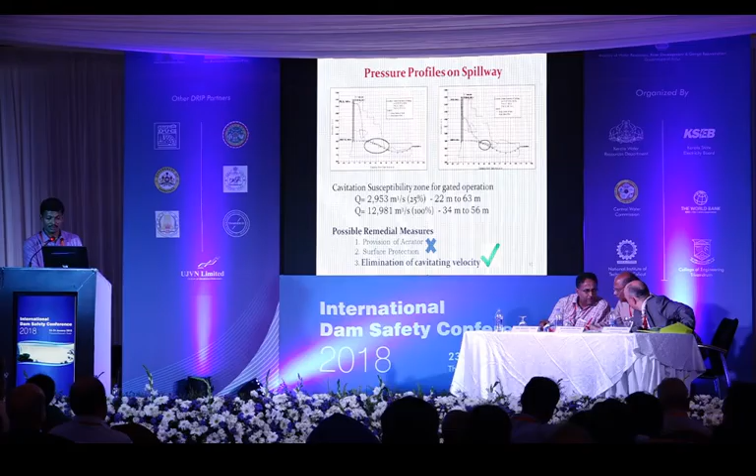Pressure profiles over the spillway were measured for different reservoir water levels and discharges, for gated and ungated conditions. For ungated conditions, the pressures over the spillway were found to be positive, but for gated conditions, a cavitation susceptibility zone was found. From the figure, the cavitation susceptibility zone is from chainage 22 to 63 meter for 25% discharge, and from 34 to 56 meter for 100% discharge.

This spillway was typically on a Himalayan boulder river which carries heavy sediment and boulder sizes of 0.2 to 2 meter, and these boulders roll over the spillway during flushing operations or floods, which would certainly damage the aerator. So the option of aerator was ruled out.

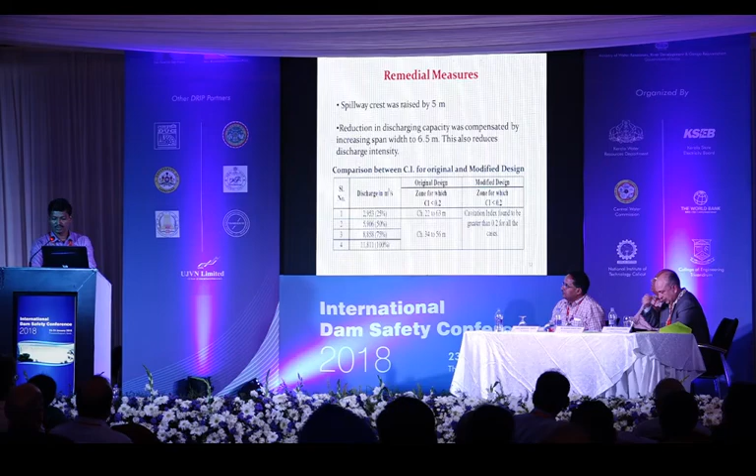So it was thought that the limiting velocity over the spillway could be reduced by reducing the head. The spillway crest was raised by 5 meter, and comparing the cavitation index for the original and modified design, it was greater than 0.2 for all cases of discharge from 25 to 100%. So the cavitation was mitigated.

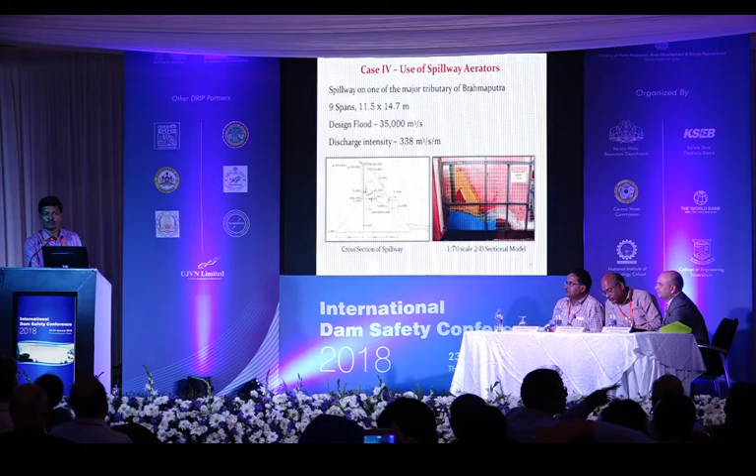This is another case, a spillway of size 11.5 meter by 14.7 meter, which has to cater to a flood of 35,000 meter cube per second with very high discharge intensity. The model was constructed at CWPRS Pune, and piezometric pressures were measured. It was found that pressures were positive for the ungated operation of the spillway, but for gated conditions negative pressures of the order of -1 to -6 meter were found, with cavitation index well below 0.2.

Here also 3 different crest profiles were tested on the model, but for every crest profile the pressure over the spillway surface was negative and cavitation index was below 0.2.

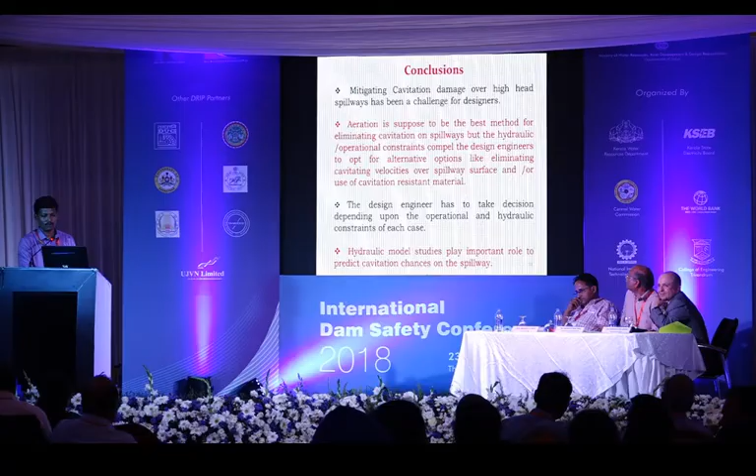So coming to conclusions, mitigating cavitation damage over high head spillways has been a challenge for designers. Aeration is supposed to be the best method for eliminating cavitation of spillways, but hydraulic and operational constraints compel design engineers to opt for alternative options, and hydraulic model studies play an important role in predicting cavitation chances on the spillway. Thank you.